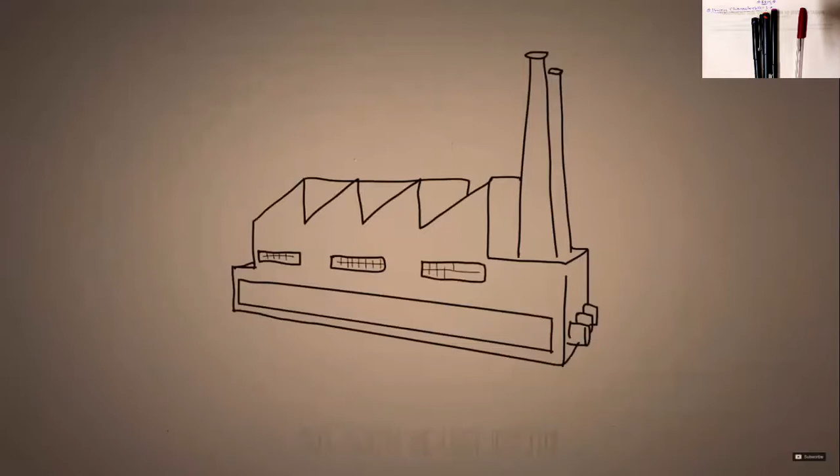All this hardship in life, but this guy wouldn't give up. He moved to work as a salesman for a tire company. But again, he lost his job when the company closed its manufacturing plant.

By the age of 40, he met the general manager of an oil company, who asked him to run a service station for him. But the station had to close down again as a result of the Great Depression.

That same year, the Shell Oil Company offered him a service station, rent-free, in return for paying the company a percentage of sales. He started operating the service station and also began to serve chicken dishes and other simple meals for people who were stopping by at the station.

His pan-fried chicken soon became a favorite with the people of the area and made him famous in the region.

A few years later, he took out the station and started a proper restaurant. After fairly succeeding at this venture, he started to advertise his food, and to his shock, an argument erupted out of the blue with a local competitor and resulted in a fatal shootout, with one of his employees dying.

Four years later, he bought a motel next to his chicken restaurant, hoping for better business. But it caught fire and burned down to the ground together with his restaurant. Yet this ambitious man rebuilt and ran a new motel with a 140-seat restaurant, until World War II forced him to close it down again.

When the war had ended, he tried selling his recipes to other restaurants. His recipe was rejected 1,009 times, when finally, in 1952, he sold his secret recipe, Kentucky Fried Chicken, for the first time to the operator of one of the city's largest restaurants.

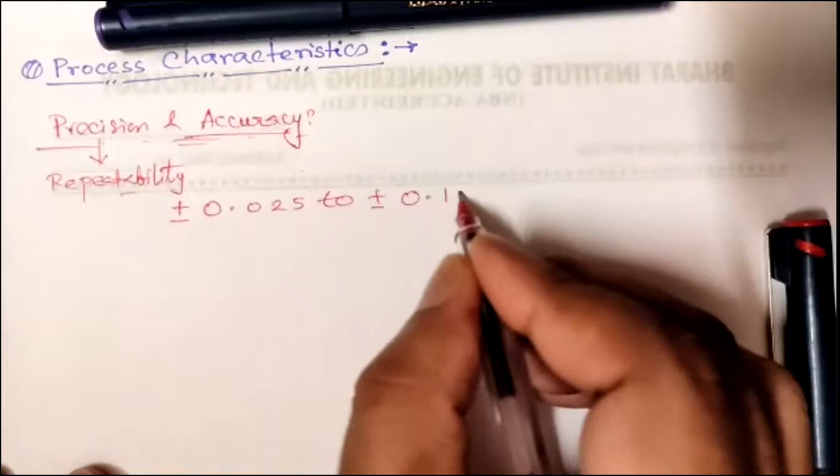So precision is also called repeatability. What is the meaning of repeatability or precision? It is like it should give the same kind of output all the time. Or if we repeat the process, it should not hamper the quality of output, right? So the degree of repeatability and accuracy of EDM is very high. It will be somewhere in between plus minus 0.025 to plus minus 0.127 millimeter. So this tells us that the accuracy is very good.

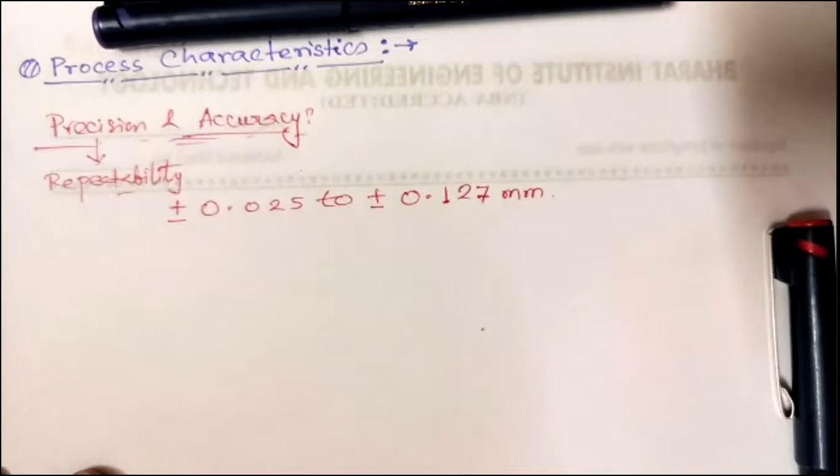And another thing, tolerance. You might be knowing about it also. What is tolerance? So tolerance will be somewhere around plus minus 2.5 micron. So this is another thing which we find from EDM.

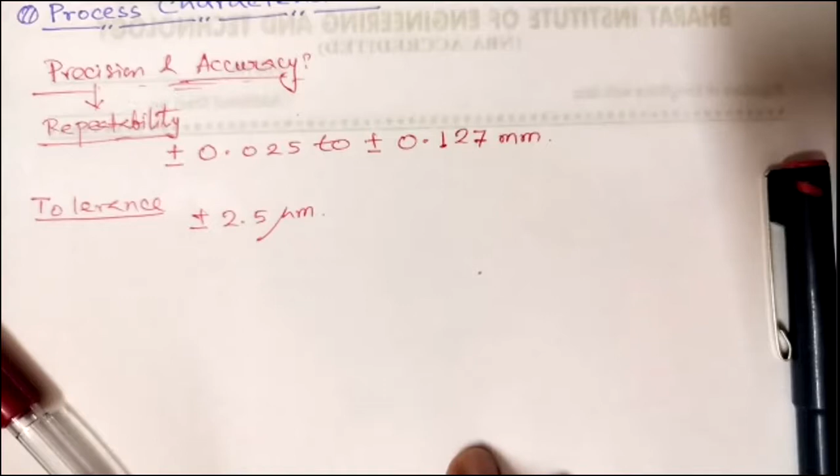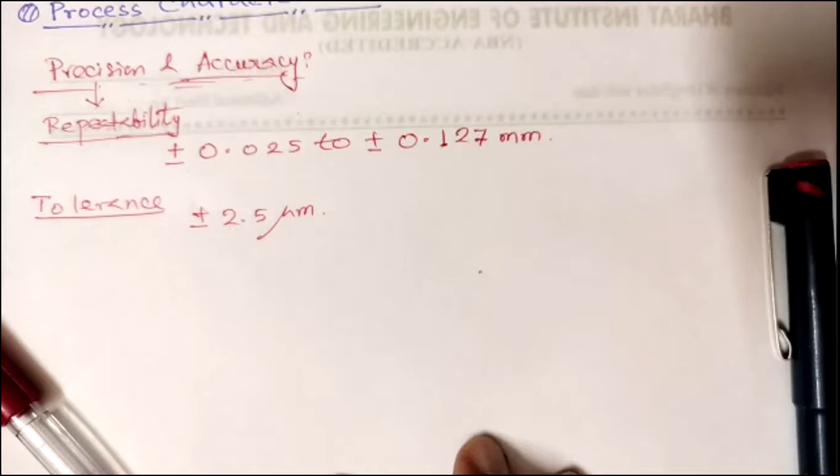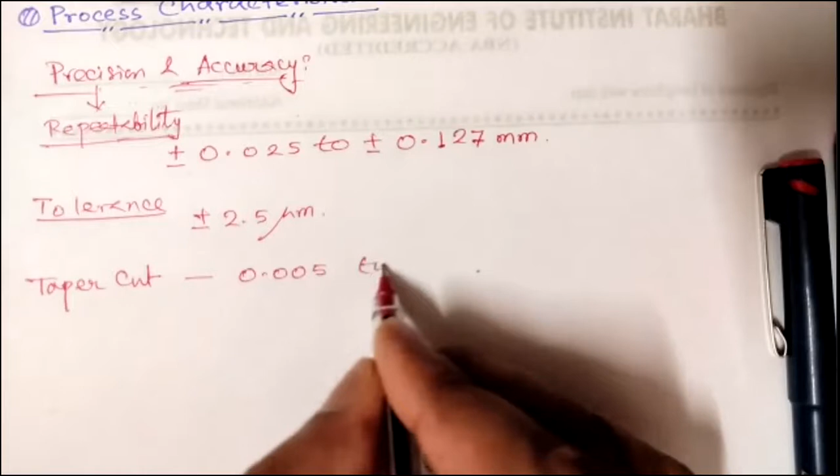When deep and accurate holes are drilled, generally we use separate tools for roughing and finishing passes. In that case, if we are using different tools, as I mentioned, we can minimize the taper cut. I have already mentioned the problem we find in EDM, which is taper cut, so that can be reduced. After minimizing it, the range of taper cut will be somewhere between 0.005 to 0.05 mm per centimeter. That means if you are cutting 1 centimeter, this much portion will be tapered. I hope you people understood. So it also depends on different parameters involved during cutting.

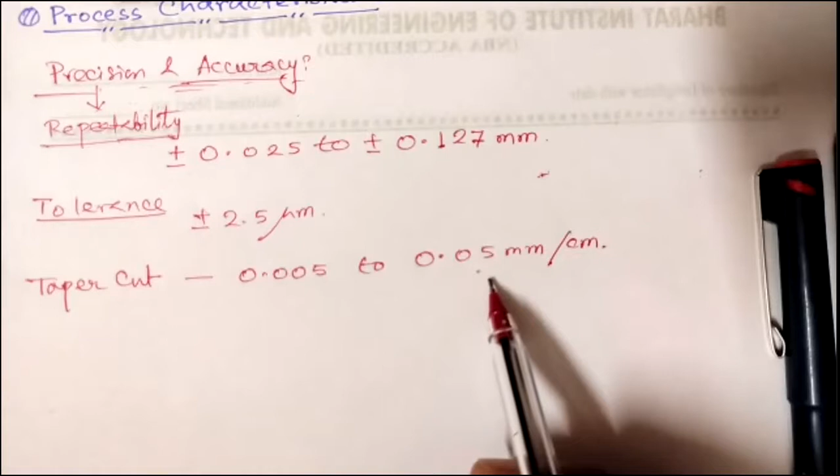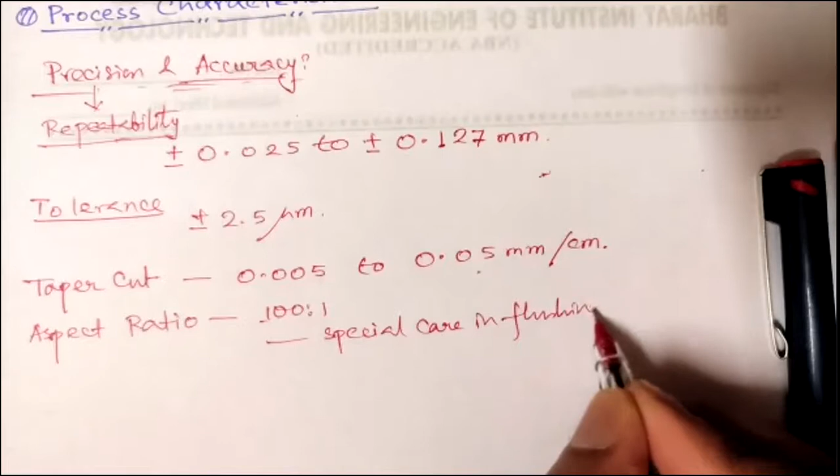Now, the aspect ratio. We can achieve a 100 to 1 aspect ratio during drilling of small holes. But in that case, we have to take special care in flushing away the debris. In that case, we can have a better aspect ratio.

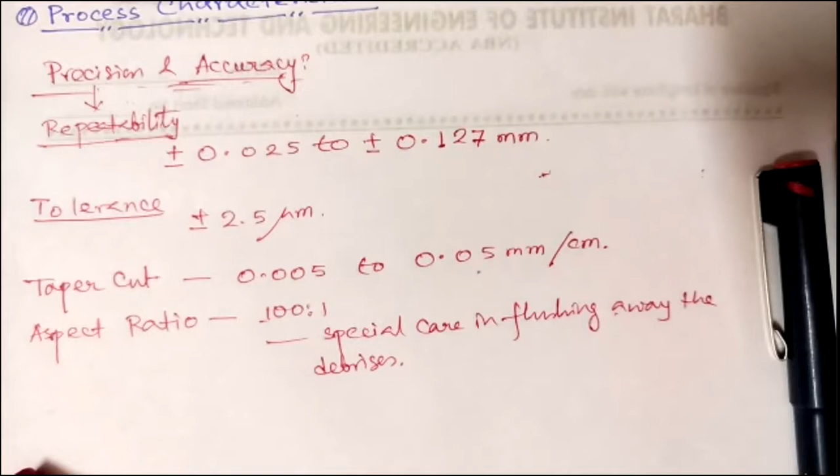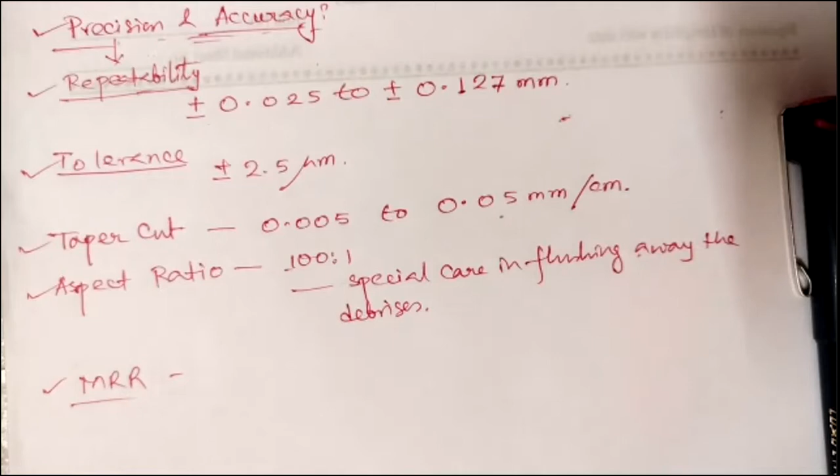Now, next is, so we talked about precision, repeatability, tolerance, taper cut, aspect ratio, and now coming to MRR. In MRR, I have discussed two ways you can compute the material removal rate. Number one is volumetric material removal rate, which you can calculate in mm cube per second or mm cube per minute, or other units of time. Also gram or mg, how many grams or milligrams you are going to erode during the machining process. So here we are discussing about volumetric material removal rate.

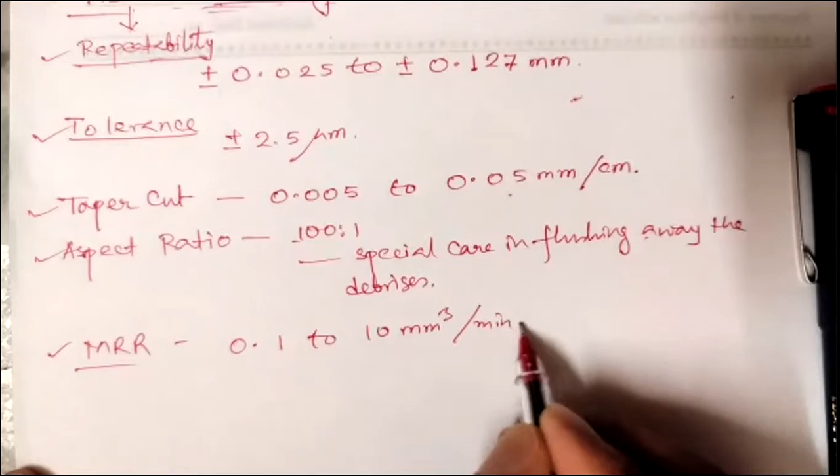Volumetric material removal rate in EDM process is quite low, somewhere in between 0.1 to 10 mm cube per minute ampere. So it is somewhat low. Actually, in all the unconventional machining processes, we will find low MRR only. But even among those, EDM doesn't give much MRR. So it is even somewhat less.

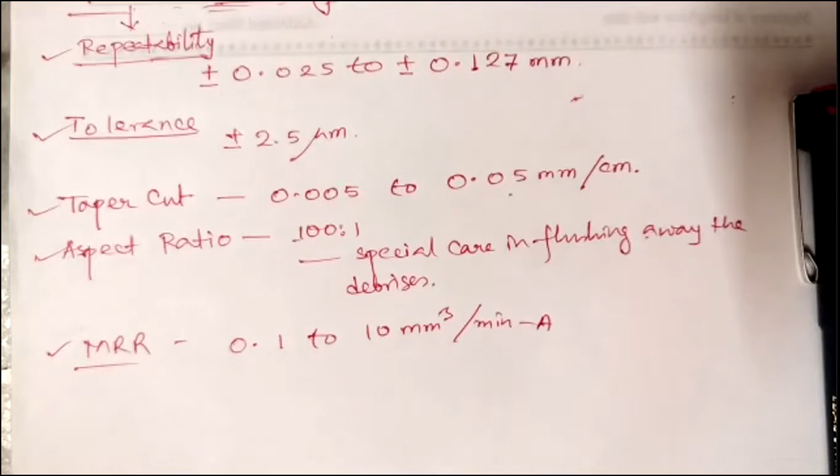Now, surface integrity. Surface integrity deals basically with two issues. Number one is topography of the surface, and second one is surface metallurgy. What is the meaning of surface metallurgy? That means possible alterations in the surface layers after machining. So surface integrity affects performance, and it will also affect the life and reliability of any component.

Now coming to another thing, that means after machining, what all effects we can find on the machined surface or on the workpiece. As it is an electrothermal process, there will definitely be some influence of heat affected zone, and I said it will be less, but it will be there. Not only that, even we will find some recast layer. So typically what will be the range and values of these, let's have a look.

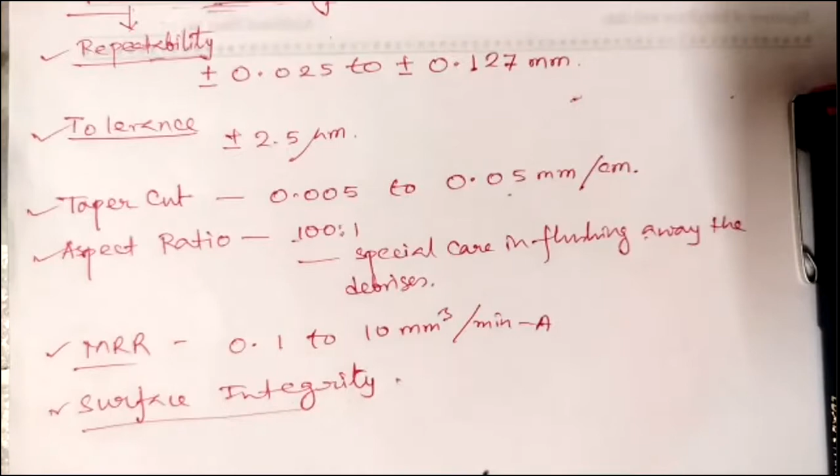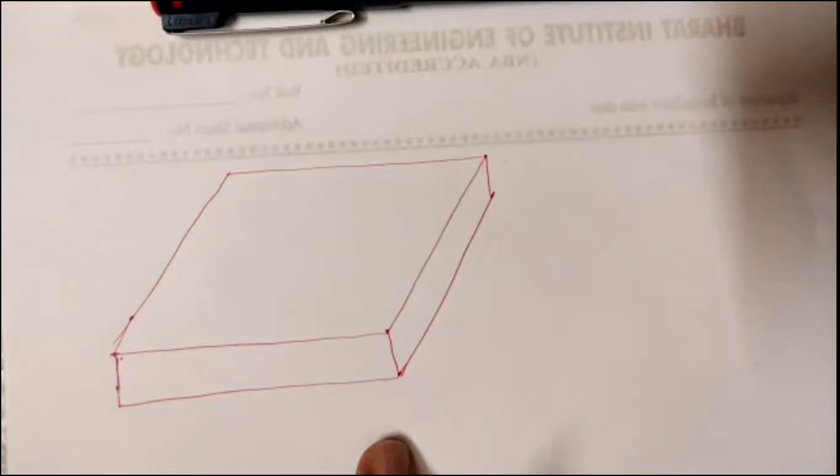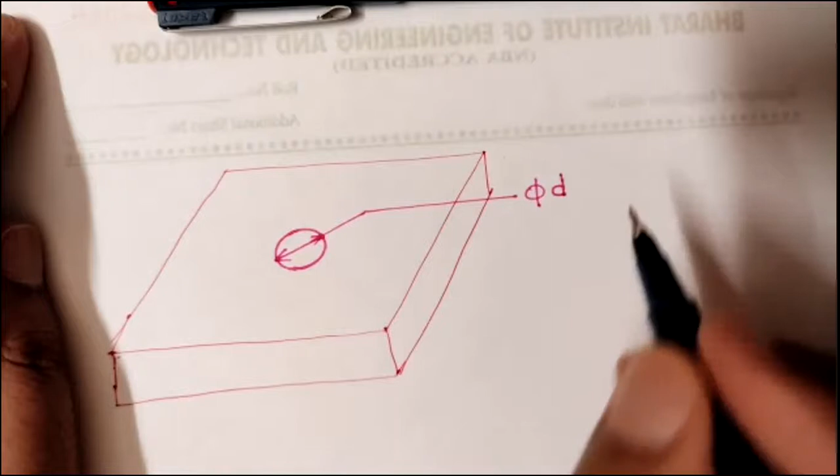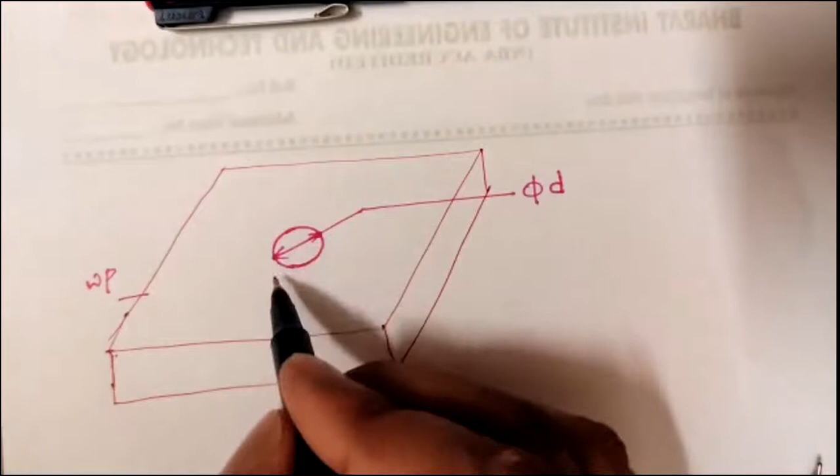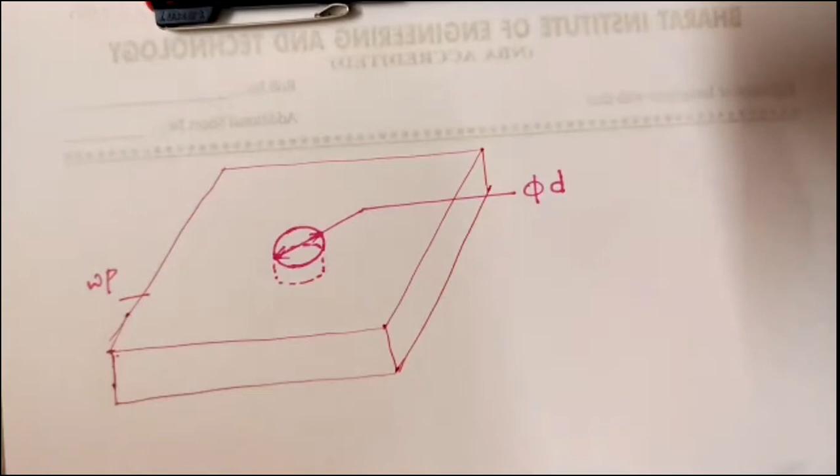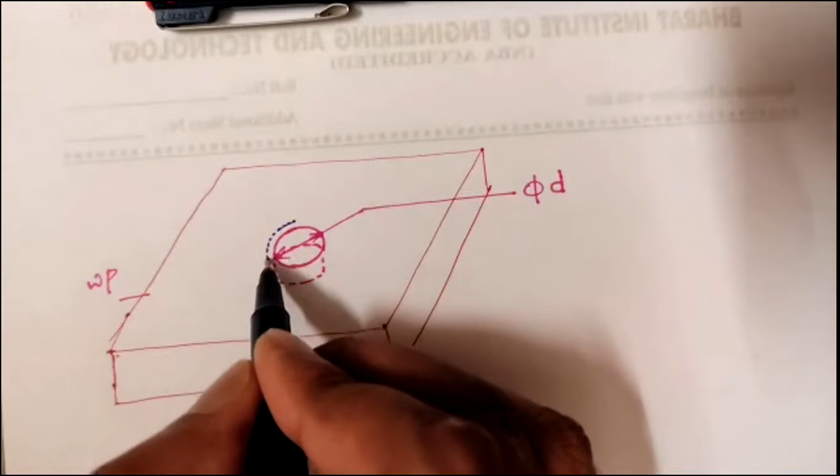Now you never want that there should be any change in microscopic structure as well as the mechanical property of the surrounding zone. But there will be a few changes in the property of the material in the surrounding zone. What will it be? First and foremost thing which you are going to get is the recast layer, but that will be very less. So outside of this hole, you will find some recast layer, limited to a certain extent. How much it is, I will tell. So this is number one, recast layer.

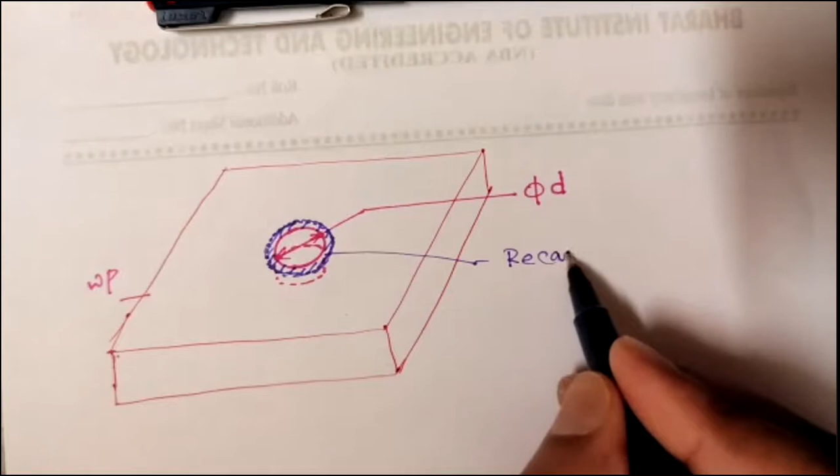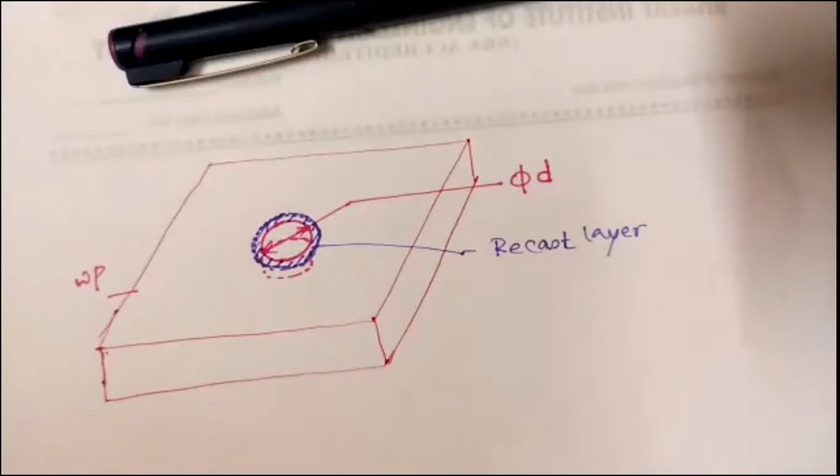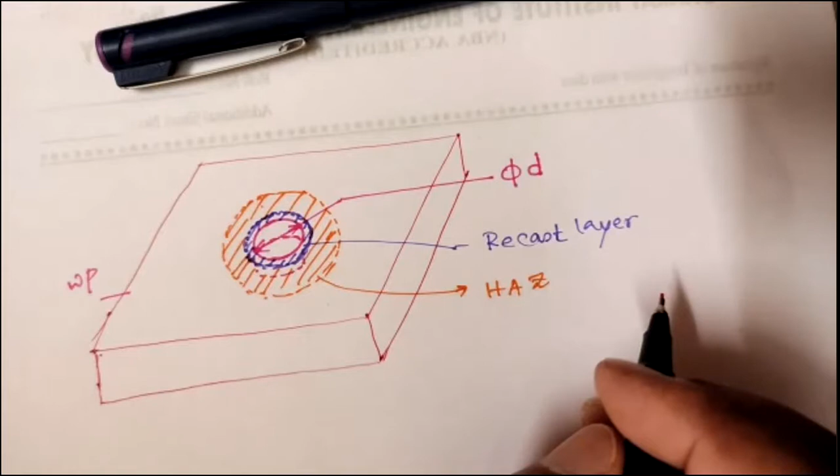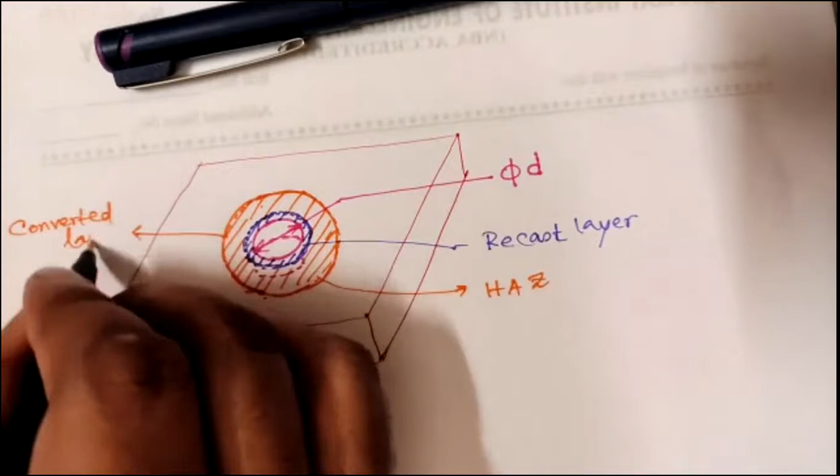Another thing we are going to find is HAZ, heat affected zone. For example, it will be up to here - this represents HAZ or heat affected zone. And finally, this will be our converted layer. So hope you people have drawn this diagram.

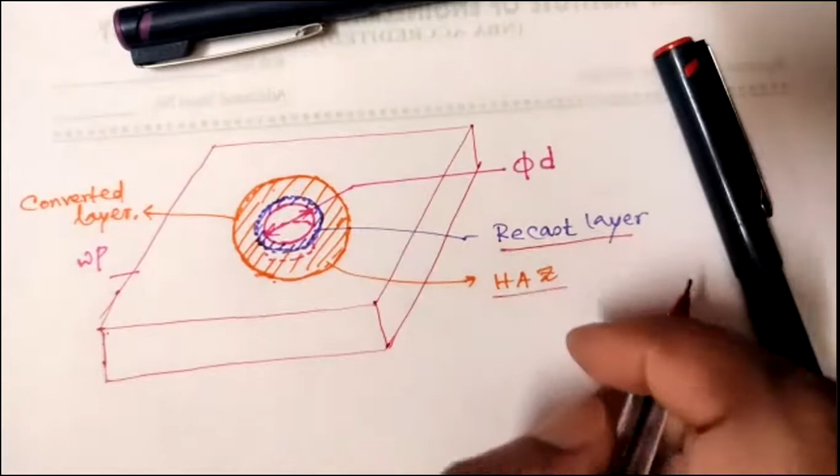So if we go for microscopic study of the machined component, in this case we have drilled a hole, and this microscopic machined component will reveal three kinds of layers. Number one layer, as I have written, is the recast layer. Number two is heat affected zone, and another will be converted layer.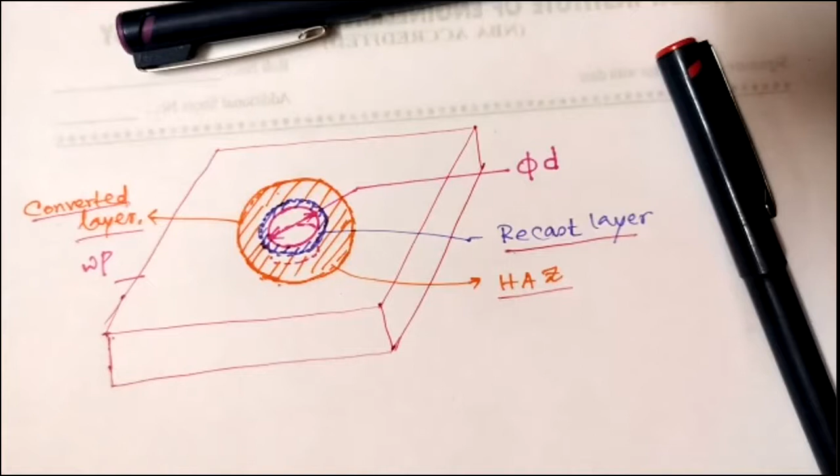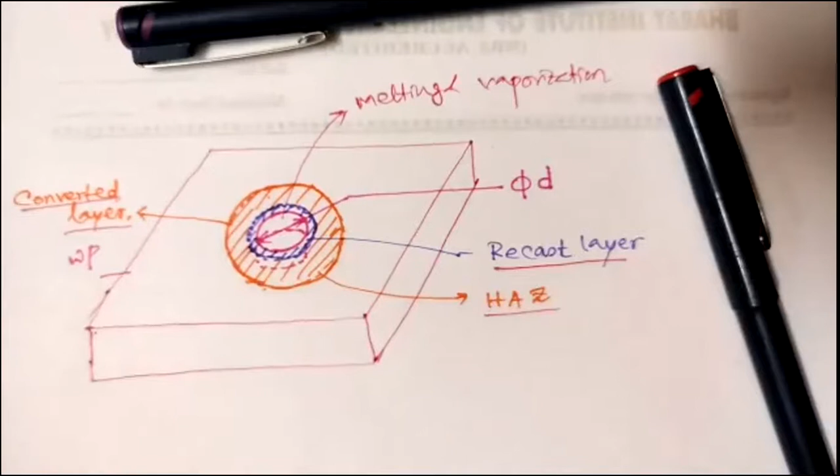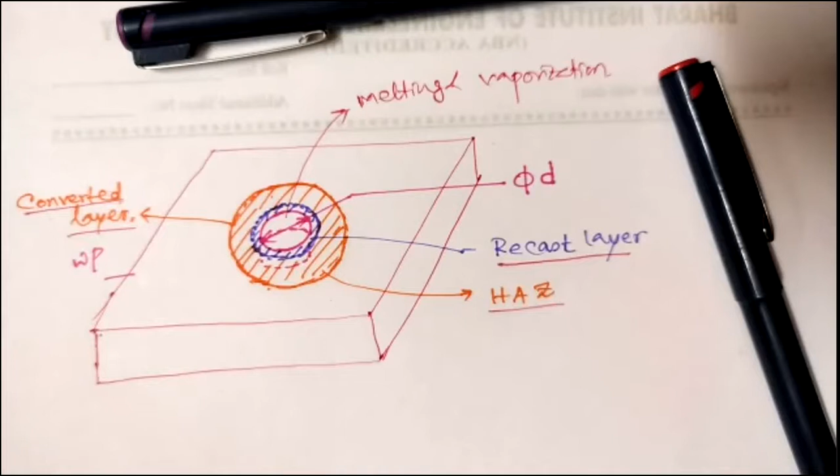So you know very well that material is removed by the mechanism called melting and vaporization. This is the mechanism of material removal, already told. So if the molten metal or molten material from the workpiece is not flushed out quickly, then it will re-solidify and get hardened. You might have already studied about Martensite structure and Bainite structure in your materials science and metallurgy subject. So from this portion we are going to melt, so it will vaporize.

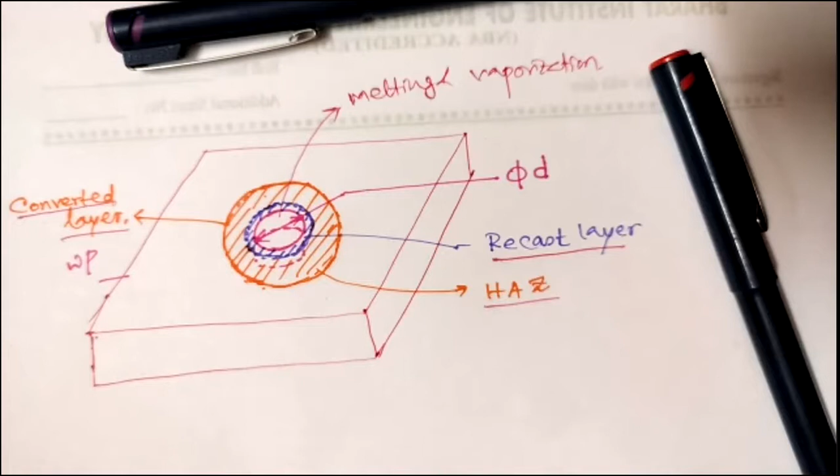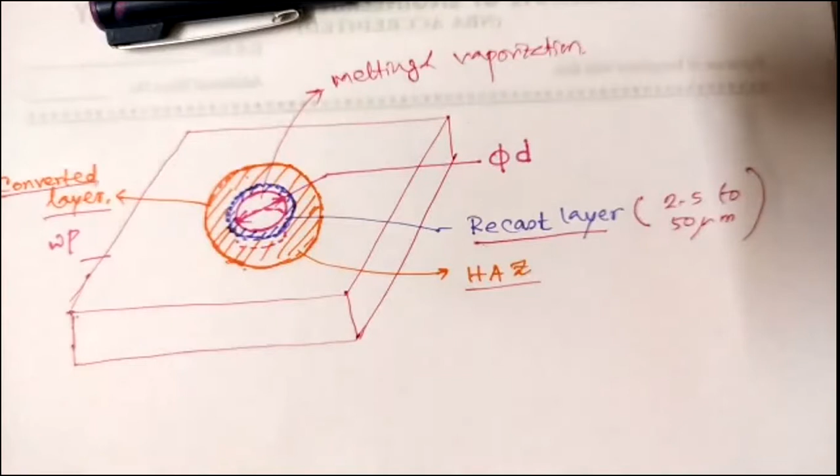If it doesn't vaporize quickly, and also after removing the material, if those debris are not flushed away, we will have some deposition here. It will be very hard due to the cooling effect of the dielectric, and it will get adhered to the machined surface. This thin layer will be somewhere in between 2.5 to sometimes 50 microns. This will be known as the recast layer, and this layer is extremely hard as well as brittle in structure.

This recast layer is very hard and brittle. The surface is porous and may contain some micro cracks. So this is a dangerous portion, since it's porous as well as it may contain micro cracks. These surfaces should be removed before using the product.

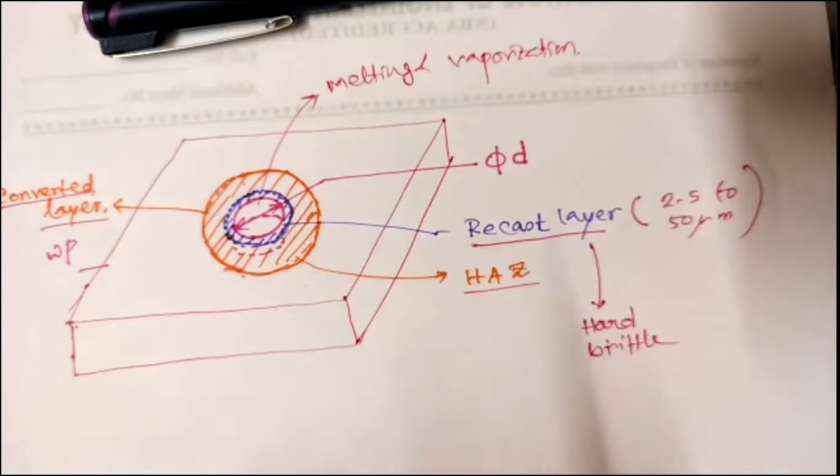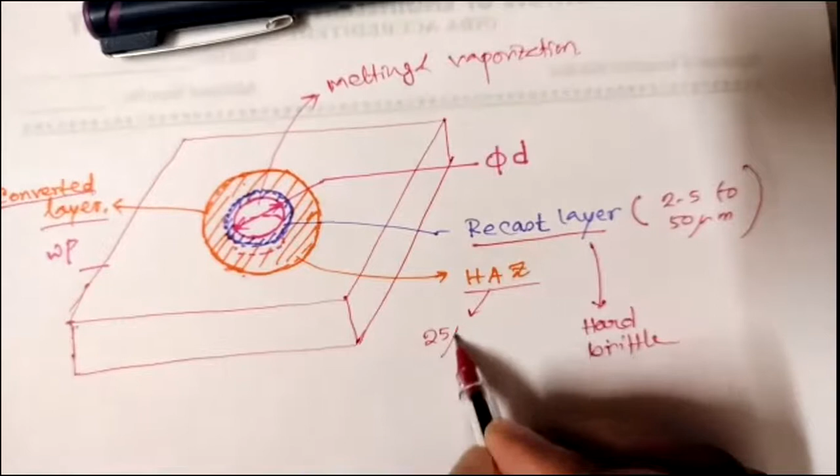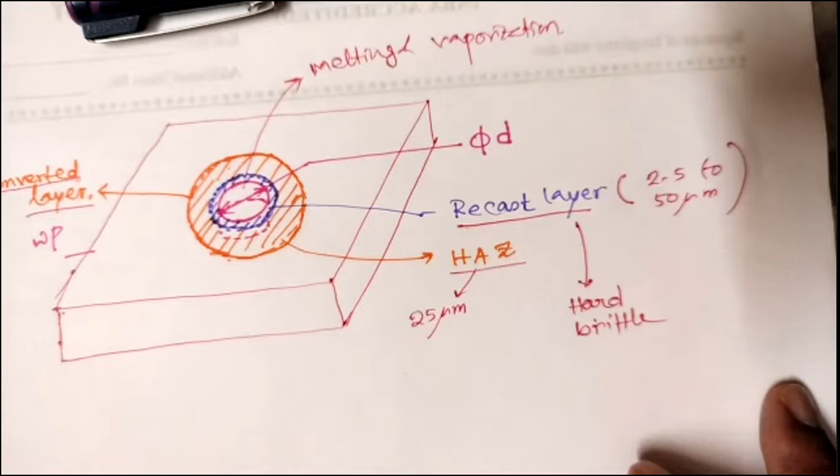The layer after the recast layer is known as HAZ, or heat affected zone, which will be somewhere around 25 microns thick. I've discussed this data previously. Heating, cooling, and diffused materials are responsible for the presence of the heat affected zone. Now, thermal residual stresses, grain boundary weakness, and grain boundary cracks may happen in this heat affected zone.

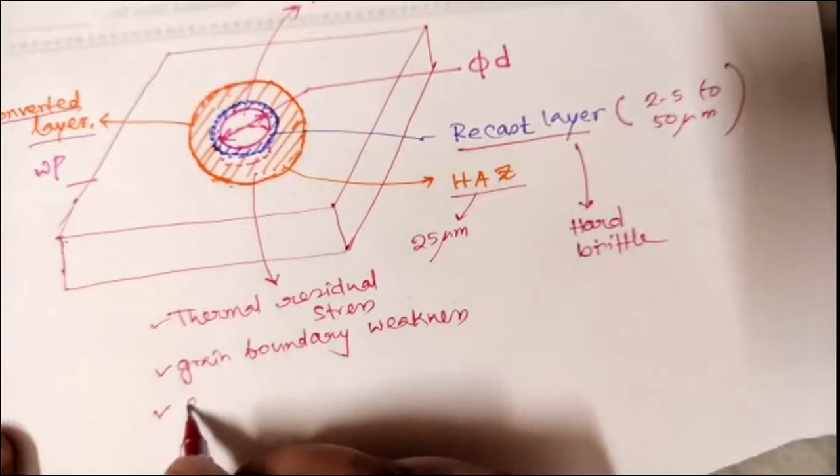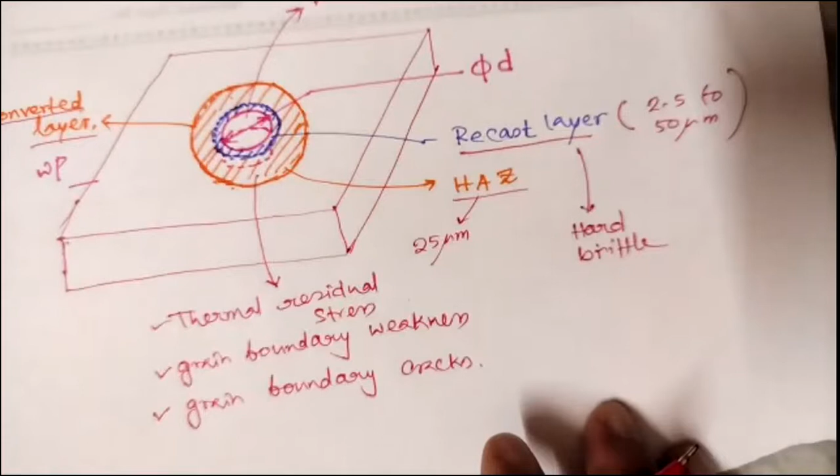So what I said: thermal residual stress, then grain boundary weakness, grain boundary weakness, and grain boundary cracks. These things may happen or may be present in this heat affected zone.

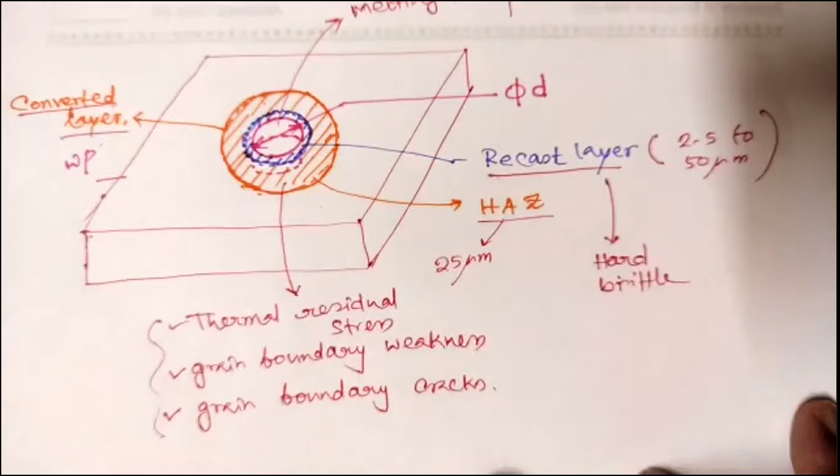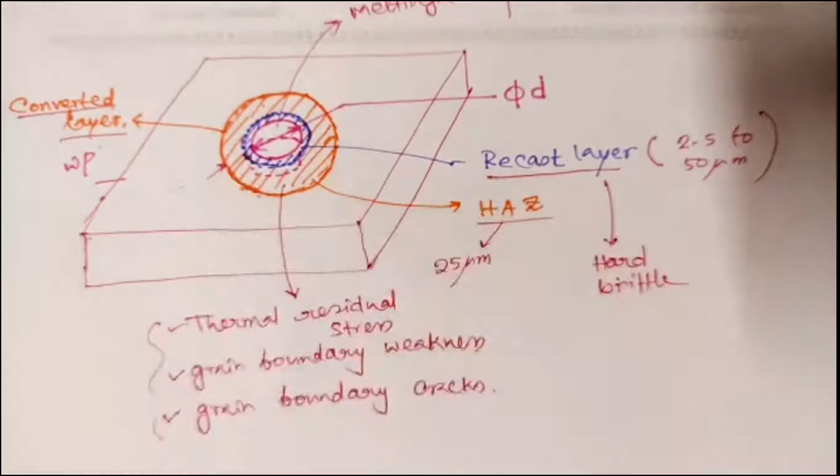And another thing I discussed is the converted layer. The converted zone or converted layer is identified below the heat affected zone, and it is characterized by a change in grain structure from the original structure. Here you will find some structure, but there the structure is completely different. That's why it is known as the converted layer or converted zone.

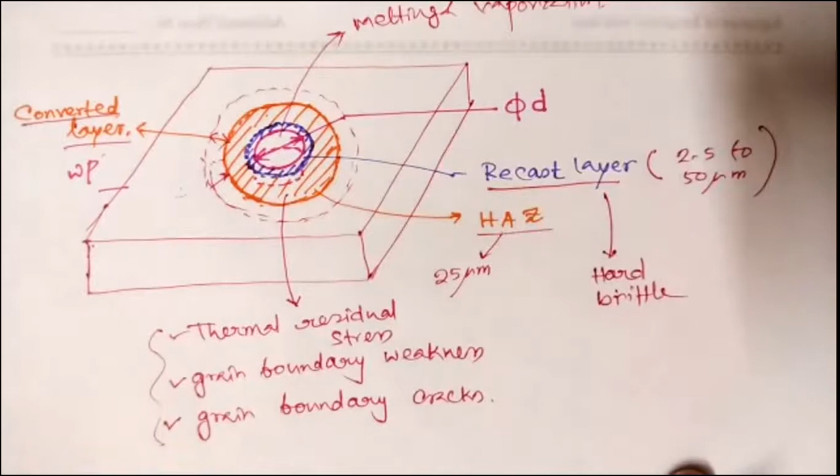This converted zone will be somewhere up to this, for example. This portion is the converted layer, so it will be up to here. So we are going to get three layers: layer number one is the recast layer, layer number two is the heat affected zone, and layer number three is the converted layer.

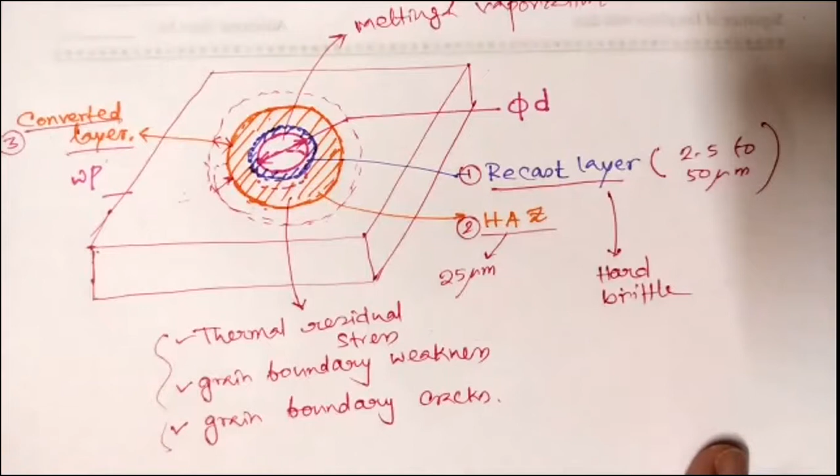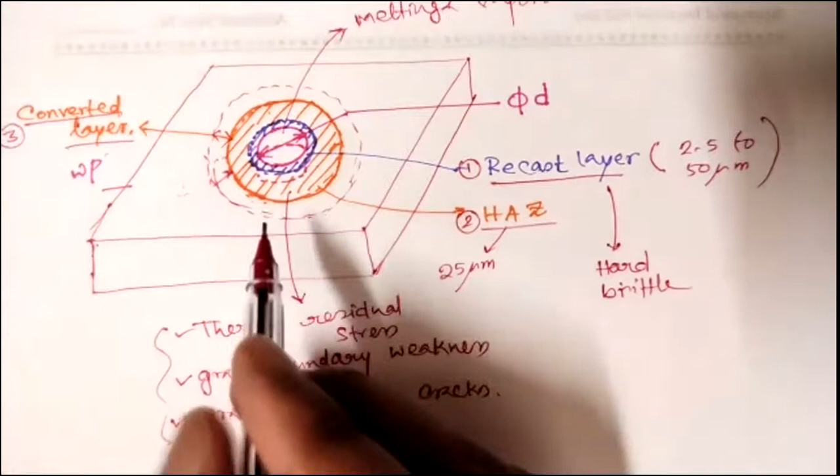So excessive local thermal expansion and subsequent contraction will result in residual tensile stresses in that layer. Many experiments have been done by researchers on different alloys or steels like mild steel or brass, and they found the thickness of this affected layer was somewhere less than 25 microns.

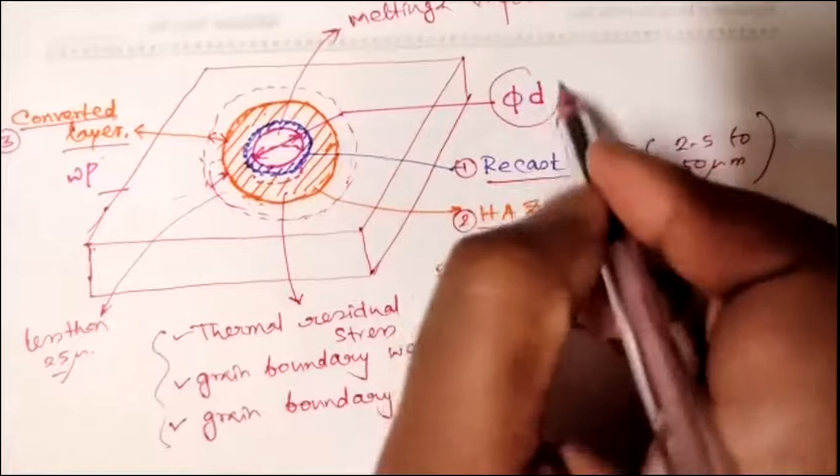So you are measuring some diameter, but along with that, you are getting the recast layer, heat affected zone, and converted layer. So these three are absolutely present along with the machined surface.

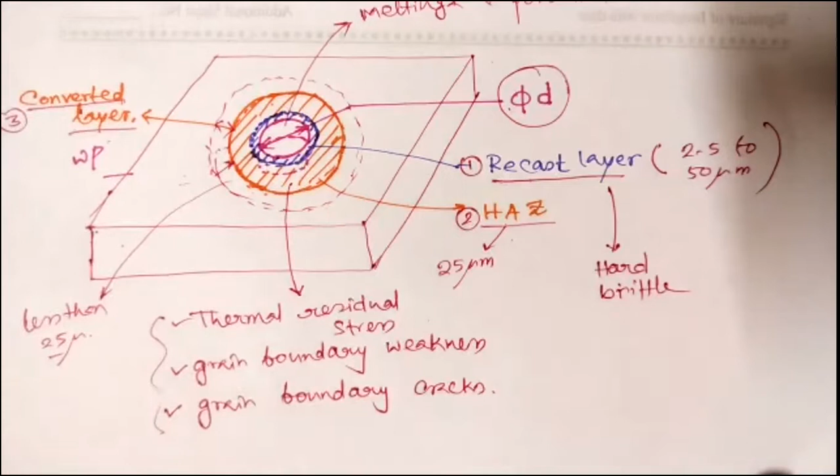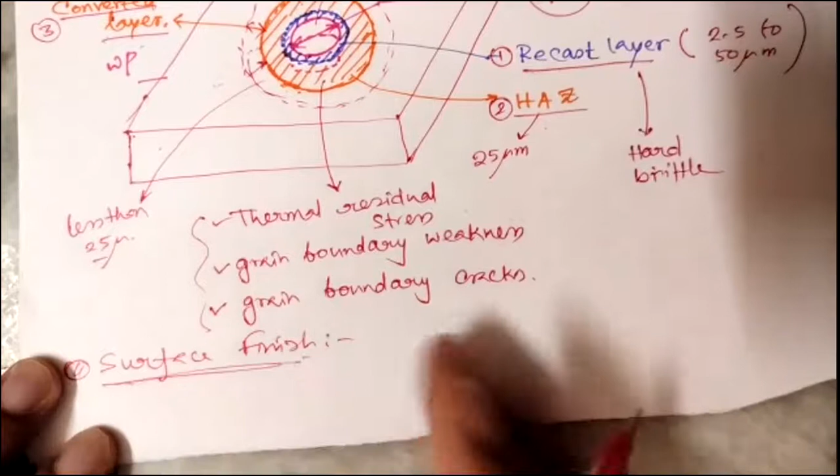Now coming to the surface finish. This is about another aspect, and then we have the last one, which is surface finish. So what is the surface finish? We achieve 0.8 to 3.1 micron roughness value during EDM.

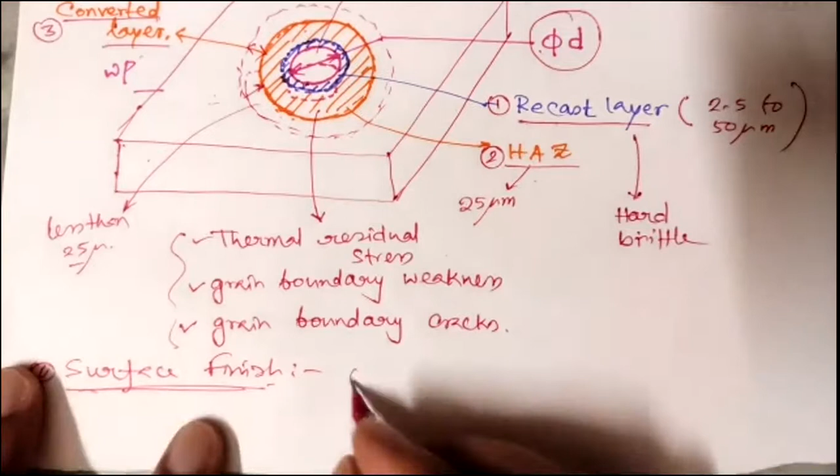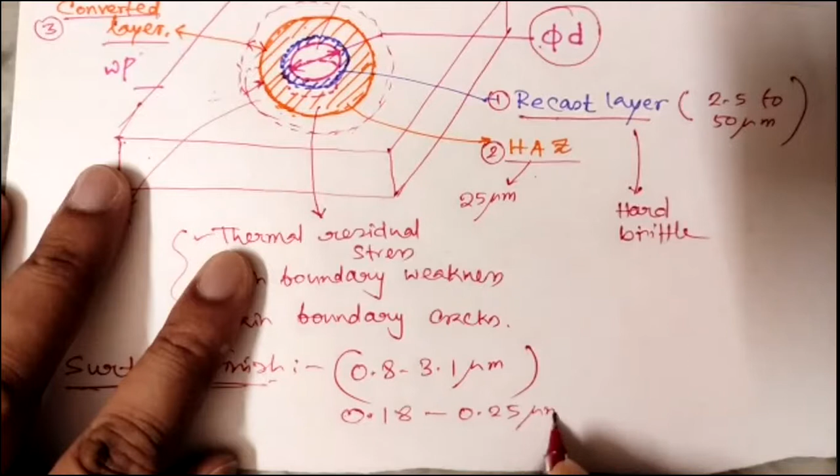But as I said, if you change the parameters, that means T on is less, T off is more, or you have used the correct electrode material, and you are using correct machining parameters, your flushing rate is good, etc. With that configuration or setup, we can even achieve a product with surface roughness value of 0.18 to 0.25 microns.

But if you are using more T on or IP, that means peak current, or SV, that means servo voltage, in that case you are going to get a reduced surface finish. So this is something about EDM, these are a few things about EDM.

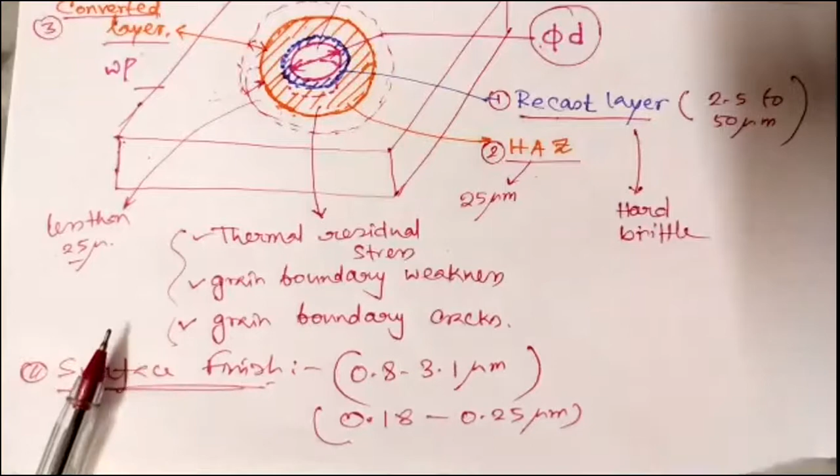In the last class I discussed about a few graphs. I'll draw those graphs and show you the characteristics of, or what is the influence of, different input parameters on the output responses. I'll give a brief on those, and then we will move forward to EDG, or electric discharge grinding.

So let's just draw these graphs. In exams, these graphs are compulsory. Once they ask about characteristics and all, these graphs are compulsory.

Let us consider that we are going to find out how the pulse duration or pulse on time will affect MRR, surface finish, and electrode wear, that means TWR. So number one, we will find MRR versus T on, or T on versus MRR.

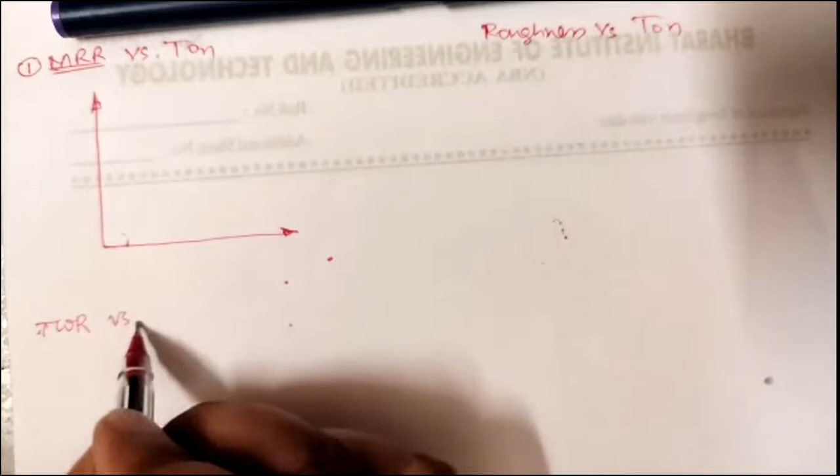Then in the second graph we are going to find out roughness versus T on, and then we are going to find out TWR, or tool wear rate, versus T on. These three graphs we are going to study. Actually, if you want to find out other graphs, you need to refer to some research papers where they have considered various input parameters and various output responses, then you can find out what inferences they got.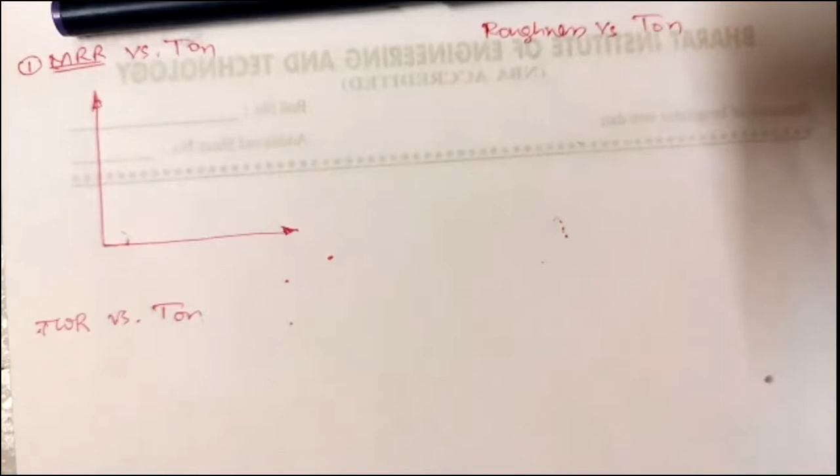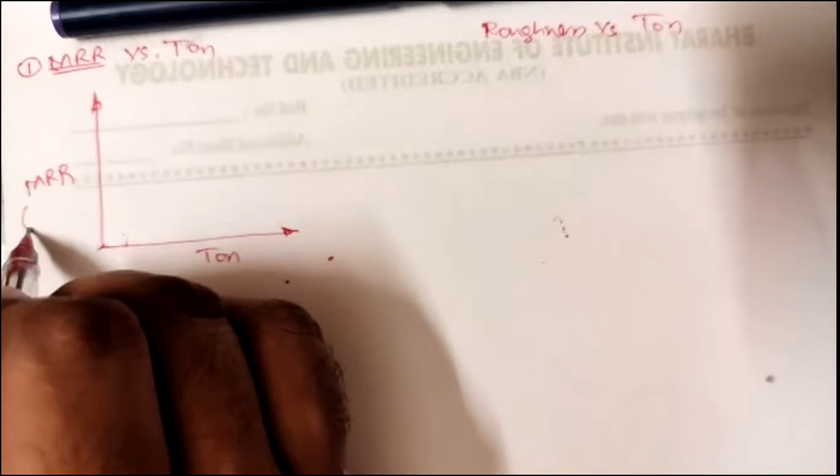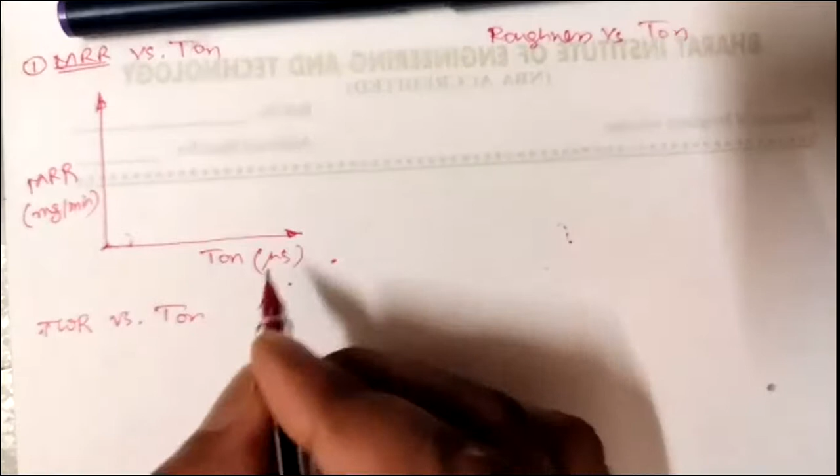Okay, so typically if you are using pulse duration, say we have 0 microsecond. This is T-on, and here we are going to represent MRR, or volumetric material removal rate, or you can go for weight loss, say in mg per minute. T-on must be in microseconds. So if we consider this is 20 microseconds, then somewhere around 100 microseconds.

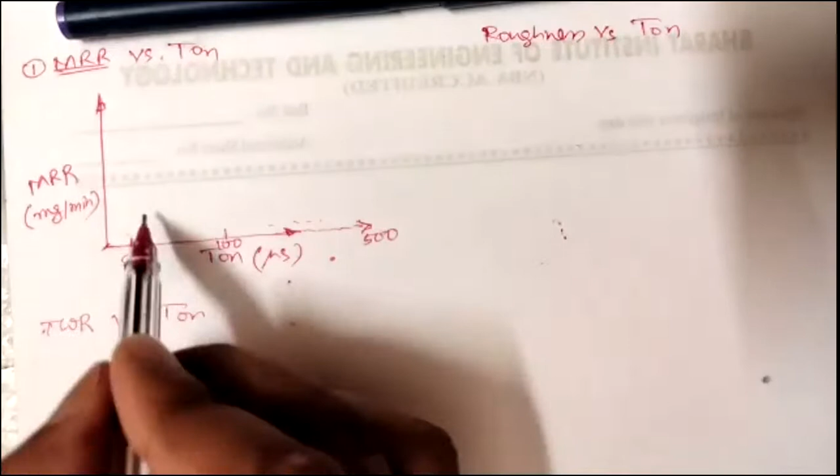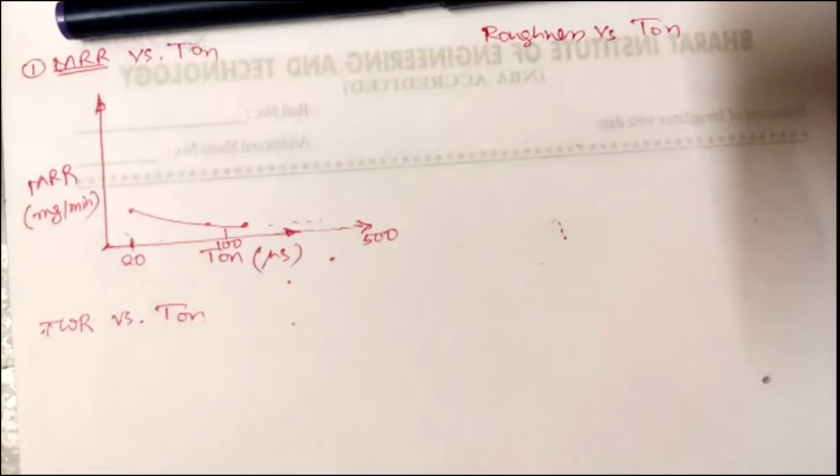And say we are going to increase it, in between up to 500 microseconds. The nature will be, if it is moving towards somewhere around 100, 110, or 140, we are going to get somewhat less. Somewhat less, and then it will increase. That is the nature, or material removal rate will increase when you are increasing T-on.

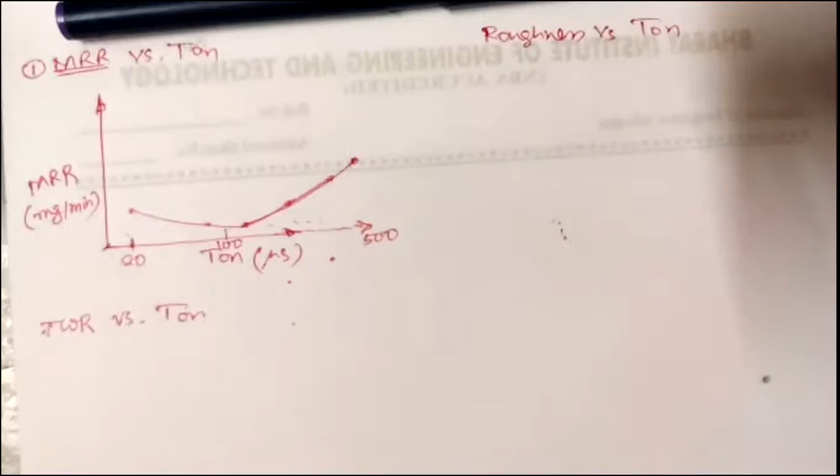Now, if you use different electrode materials, like brass, copper, or graphite, depending on that, and keeping the same dielectric, suppose you are using distilled water, you are going to get this kind of curve. In some cases, like if you are going to use copper, then your total pulse duration, meaning T-on plus T-off, if we are mentioning that, then it will be somewhat downwards.

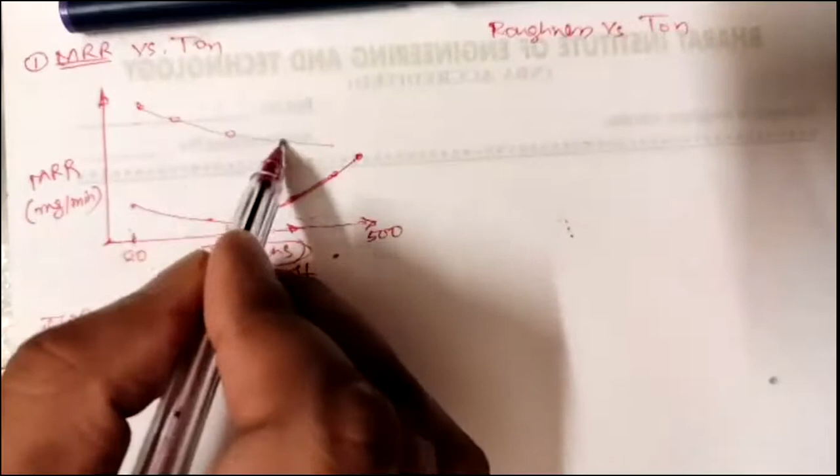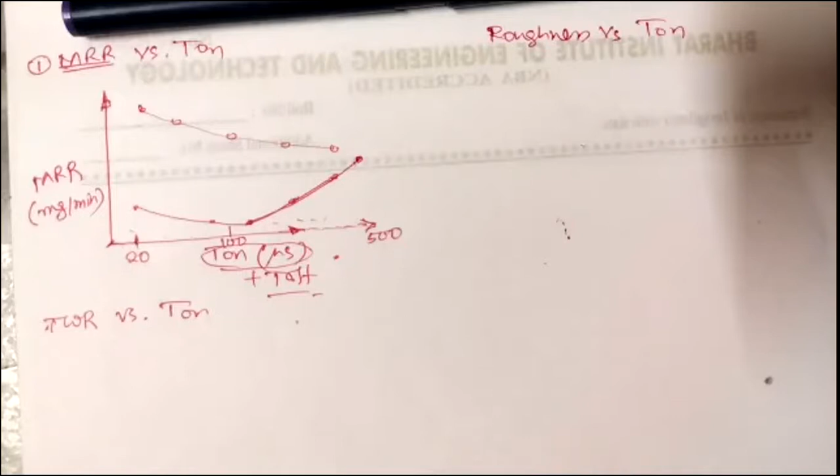Where you are having some T-on, but T-off is much higher, so total pulse duration will be more. In that case, you are going to get somewhat a downward graph. But in this case, if you are going to have plus T-off, again same, you can keep 20, say here 100, say here 500.

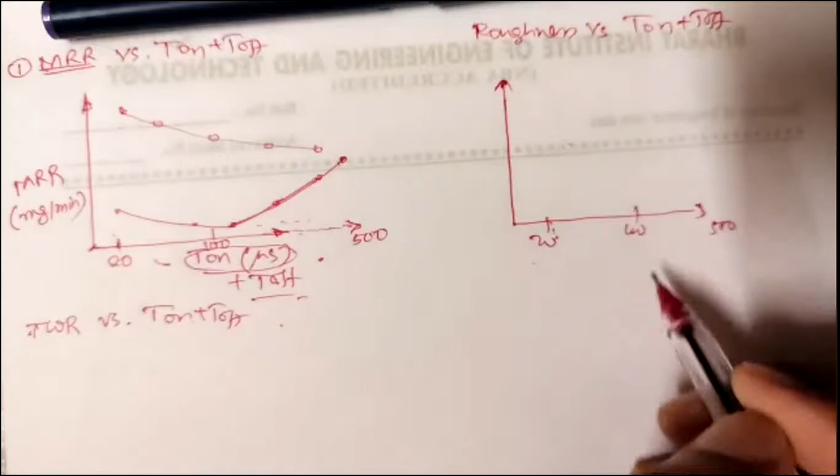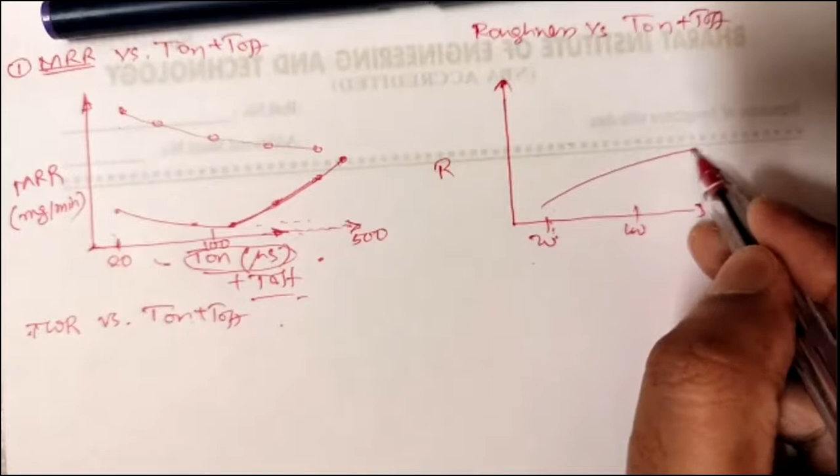And if you are going for roughness R, in that case, whatever electrode you use, it will be increasing. Suppose this is one electrode, so if you are using brass, it will be somewhere like this. In case of copper, you will get something like this. In case of brass, you will get this. Why am I making this?

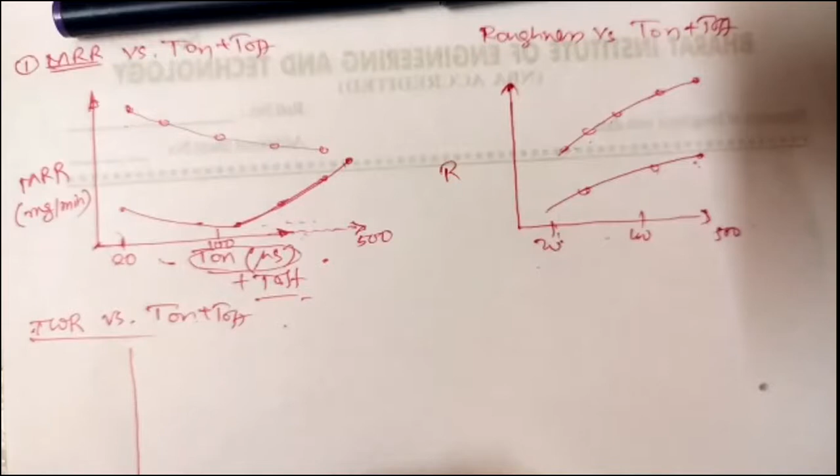Because experiment number one, experiment number two, three, four, like that. Once you are increasing the T-on, this will be the surface value, and for tool wear rate, if your pulse duration is increasing, this slope and this slope both will be somewhat similar. So here you may get something like a downward curve, or you may go like this.

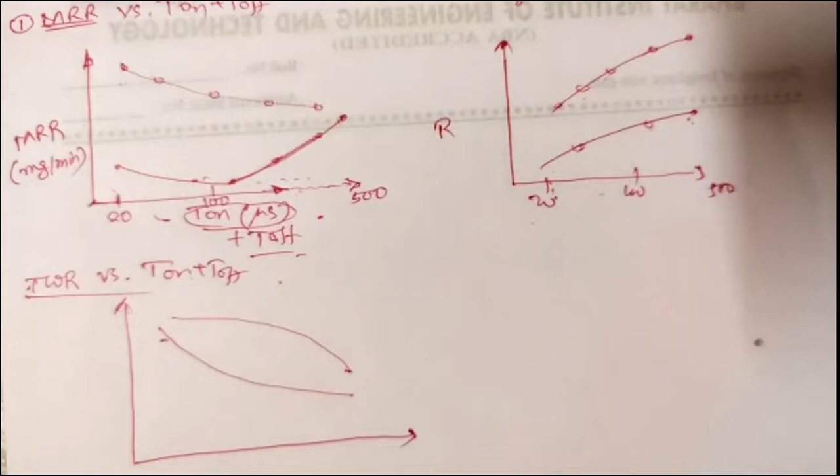It will depend on which kind of electrode you are using. This kind of profile will come in brass. If you are using copper, you are going to get this kind of curve.

So these things, people are advised to visit or refer to some research papers, and then only it will be useful, or you can understand differently. I have discussed here T-on and T-off and their combined effect. But if you want to find out the influence of only T-on, only T-off, only flushing rate, or you can choose any other factor like current, peak current, or servo voltage, how it is influencing all the parameters or responses, you have to find out some research paper for that.

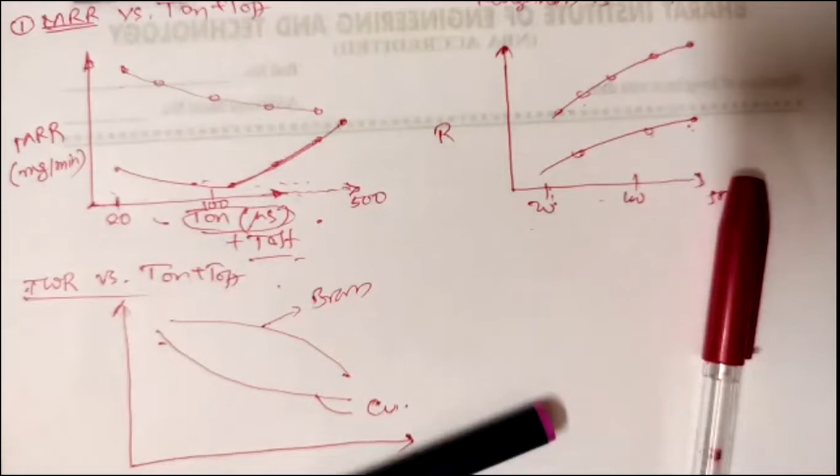Okay, anyhow, I found the time is over. So EDG, or electric discharge grinding, in tomorrow's class we will start discussing. In tomorrow's class I'll be covering complete EDG, and if time permits then we will move for wire cut EDM, which is the last topic of the third unit. Actually this unit, EDM, was not very big, but I tried to give you more and more input so that you can understand in a better way. Next class, as I said, we will discuss all these things.